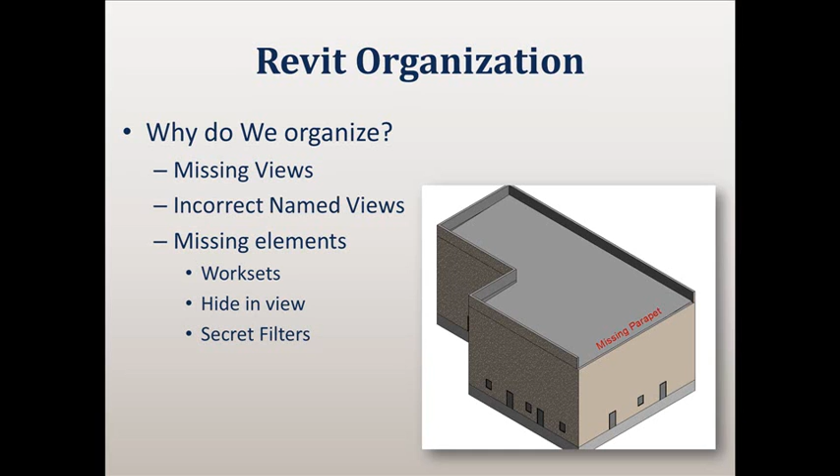Our methodology uses multiple levels to organize our stuff, and we start at the macro and work to the micro.

I've seen a lot of firms manage this, but typically on a level playing field, like we're going to use all view naming conventions, or categories, or subcategories, or work sets. But the fact is a lot of these methods are fairly labor intensive, and therefore you don't get user buy-in. If you tell someone they've got to go through every view and hide the furniture category, they're going to revolt, and it's not going to happen.

So what we want is a system that allows a multi-layered attack on this, so you can work at the macro level and people can add stuff very quickly. But then when you get down into the micro level, they can individually do it, and you don't have to apply that same micro level to every single view.

We also want to be able to engage multiple levels of expertise. We all know the BIM manager and the lead BIM are perfectly capable of managing the Revit file, and it comes out perfectly when done. But you've got varying levels of users in your office who may or may not understand how this all works, so they look to people who come to these seminars to explain how it functions.

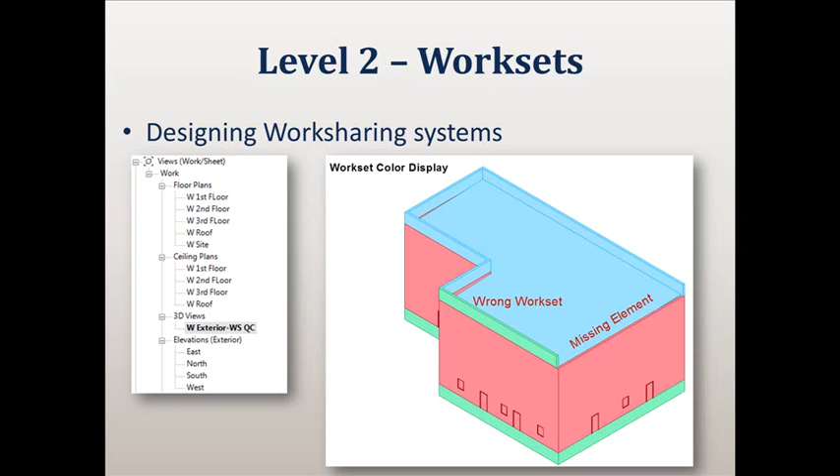Next level. Once we've got all of our work sets worked out so that we have individual items shown in individual places where we want them to, or whole groups of work sets, we then use our filters.

Filters was another one of those tools that when it first came out, I looked at it skeptically, saying well it's a nice tool but I don't really see what I'd use it for. Shortly thereafter, I found myself building hundreds of filters for every project. Again, this was prior to the workset visibility control, so we were using filters to control visibility of everything. That's fairly labor intensive, which is why we inserted the work sets above it, because that's actually fairly simple.

So what do the filters do? How many people use filters? All right, lots of people. So basically, you guys know what filters do: use individual elements based on the properties of that particular element. It's two steps: you create a filter criteria, and then you apply overrides based on that criteria.

How many people have these filters built into their templates? Just a hint: a good thing to do is to at least build the criteria into your template so your users can just grab them and use them.

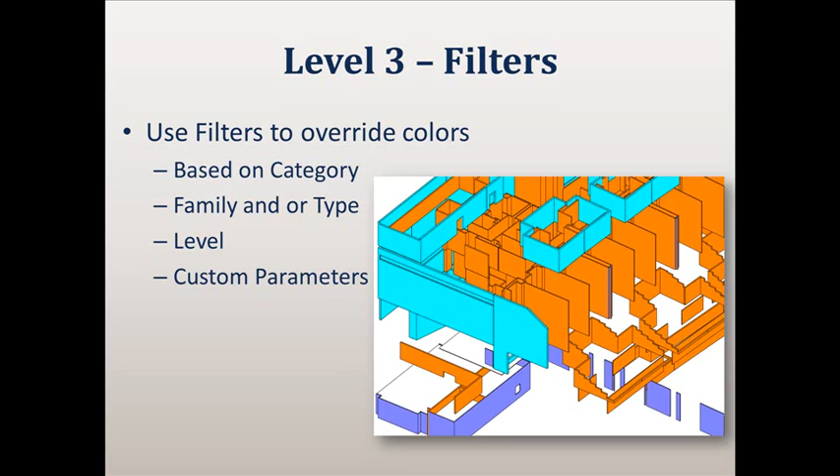We have standardized colorizations for all of our varying wall types - concrete walls, masonry walls, brick walls, gypsum board walls, furring walls, et cetera. We have all that information built into our template so that whenever a wall turns up orange in a filter, we automatically know it's GWB and nobody has to explain that to anybody. We have the view templates set up to do that, and I'm going to talk about a new feature in 2013 that allows you to automatically apply that. Not to say it doesn't work in 2012, because we've been using it for 4 years and it works great, but 2013 has a new feature that lets you just do it without any user interaction whatsoever.

Now, I put the category overrides below the filters because although they tend to be a little more coarse than the filters, we typically go to the filters before we go to straight category overrides. Everybody knows the category override is the standard visibility and graphics where you turn on and off a particular category, or override that entire category's color, pattern, line type, etc.

Now, if you go to override walls, for instance, all your walls are going to change based on whatever you put into that category in that particular view. So if you want your walls to be half-toned, green, or blue, you can override that, but you can't do it on a multiple level. You basically get all or nothing.

Now, the reason that that's a problem is that very often users think, oh, we just see this little piece of the building, and we're going to go override the walls to half-tone them so that the furniture will punch out or something like that. But then someone comes along and duplicates that view because it was misnamed, and the walls end up half-toned on a sheet that gets printed that they're not supposed to be.

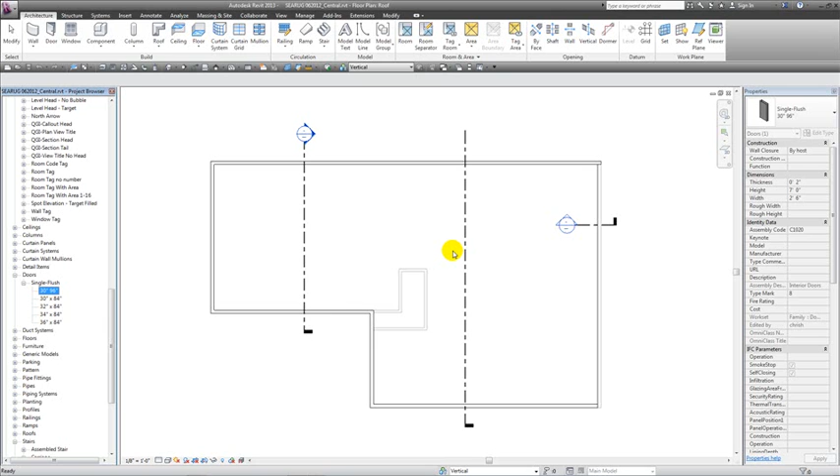You're talking about on the levels itself? Yeah, so we have like the level of plans, calling it S level 1. You just rename that there, not override all views associated with it.

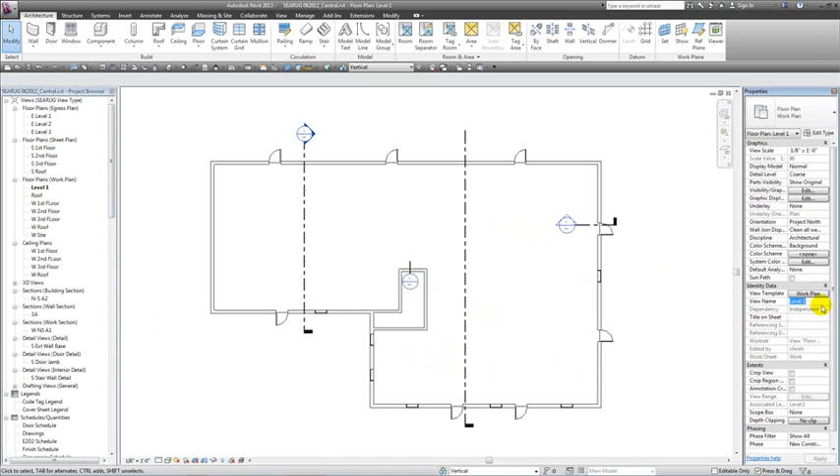Correct. So when we make a new view, we'll make a new floor plan, go level 1. Okay, come back up here. Okay, if I rename this level 1.

So the question is how do you keep the level name and the view name from associating with each other? Revit asks you when you make a new floor plan and rename it, do you want to change the level name and associate them? I always say no, and as soon as you say no, they become disconnected and they never bother you again. You have to do it once for each level or once for each view, but once you do it, it takes care of the problem.

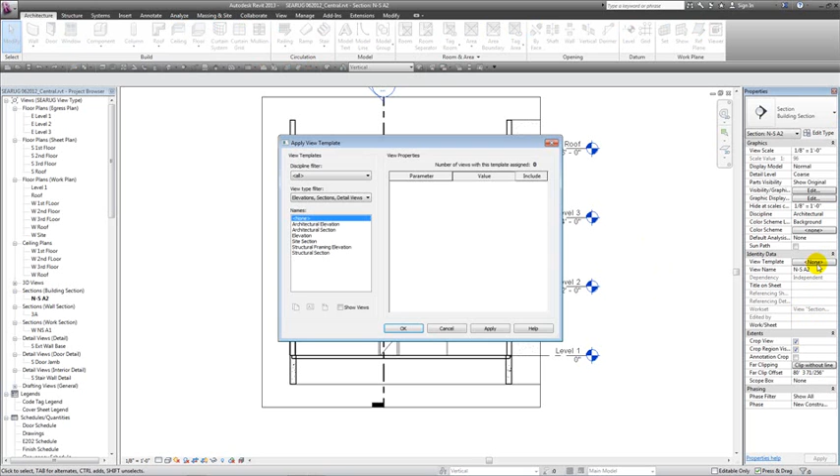Now, the other thing we're looking at is how view templates can control that based on the type name, the type properties in 2013. In 2013, we have more control in that we can assign a view template directly to the view, and it'll always have that view template. So a lot of this stuff seems like we can start to handle with view templates in 2013. But prior to 2013, you just have to try to rename the view. When Revit asks if you want to rename the level, say no.

Otherwise, you end up with all your levels with S or W in front of them.